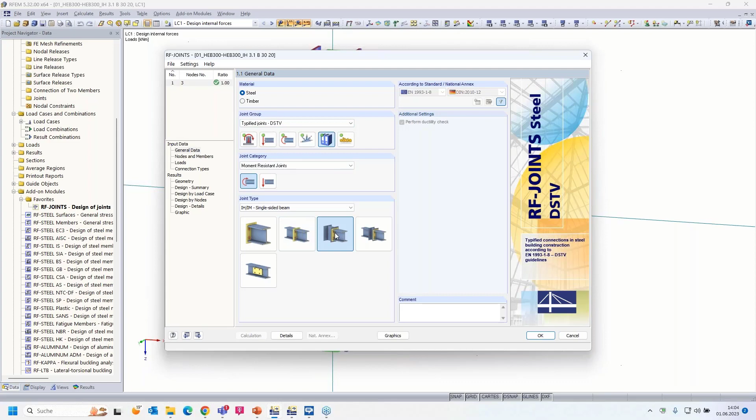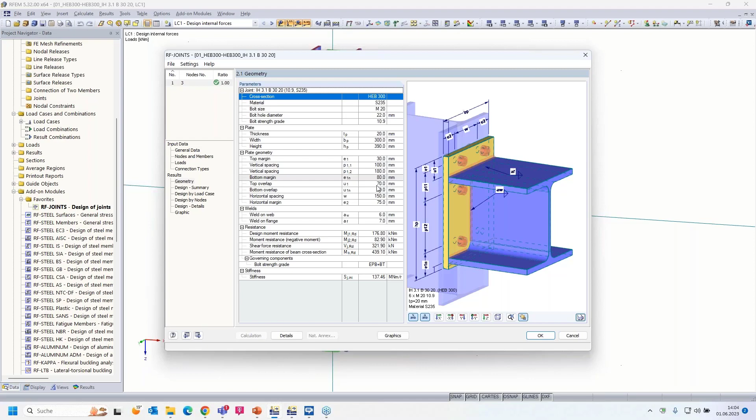Where are the DSTV connections? Rigid connection here. I had only one load, design internal forces, and this is the geometry. I will enter those or some of these values in our steel joints add-on - those are from the guideline. So that's the design summary: I applied the maximum load of 141.5 kilonewton meter, and I got a design ratio of 100%.

I would like to design that connection in RFEM 6 and compare the results. In the first step, only the moment; in the second step, I will combine M and V, the shear force as well. I can also show the connection in the preview. That's the preview.

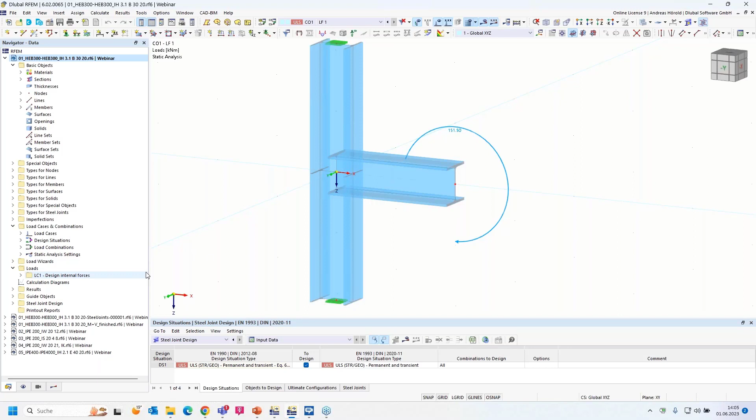So then I turn to RFEM 6, the same model. I had to do some preparations. We can't design a load case in RFEM 6 anymore; we have to define a design situation. I can show it. The first step is the load case, design internal forces, and there's only one load combination with that load case and the design situation, and steel joints is activated for it.

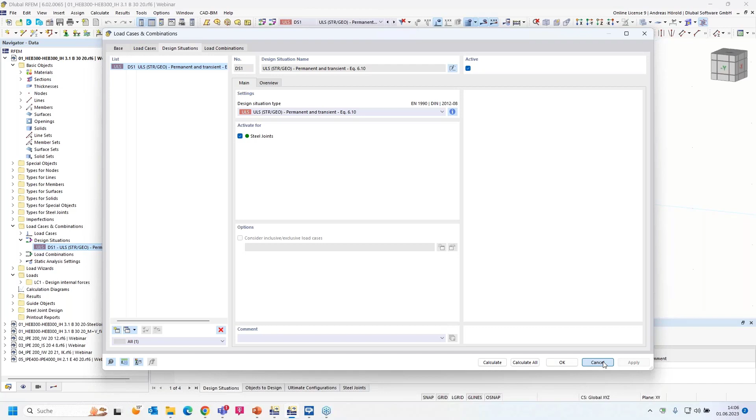Of course, it's necessary to activate the steel joints add-on first. Here, left above in the base data and under add-ons, it's necessary to do this check here.

Then I start with the types for steel joints. That object is activated when you activate the steel joints add-on. With a double click, I can open the dialog here. I have to assign a node - that node here.

It detects 3 members, and under members I have to support at least one end. That's automatically defined, I can change it, but it's quite good to have the support here on member 1. But member 1 and member 3 are continuous - that's the column, and the column is continuous.

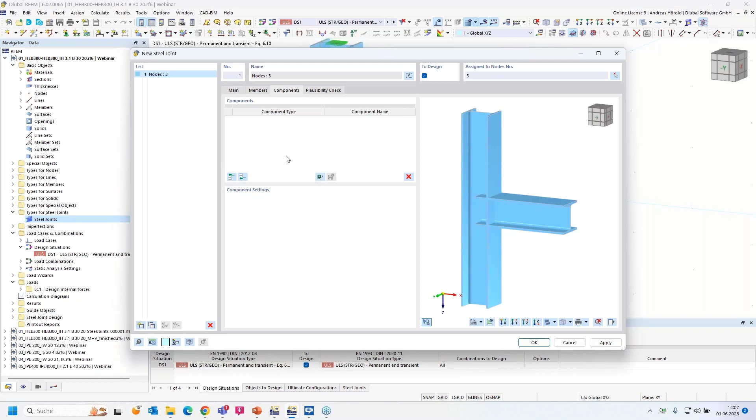I don't change any base data here for the material or the section, I leave that as it is. Then we have to enter the components. There are 2 possibilities: I can insert a component from the component database, or a complete connection from the library. I will show you both possibilities.

I start with a single component, an end plate. Now you can see here the different modifications: stiffening elements, plate, stiffener, haunch, end plate, fin plate, cleat, and so on. I choose the end plate.

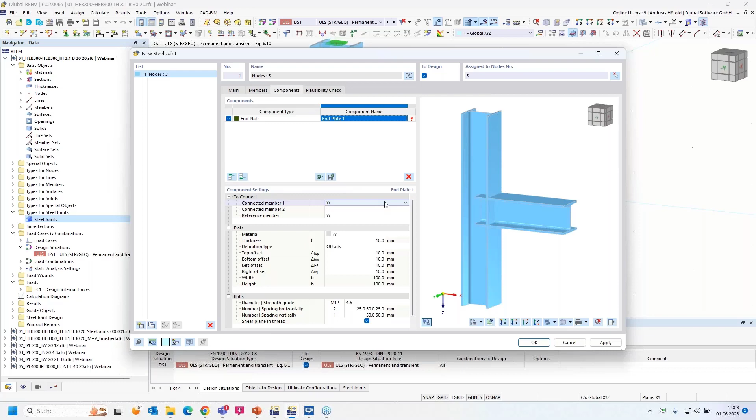The connected member should be member 2. Here you can see in the window on the right side that it's selected with yellow lines. Maybe I can zoom in a little bit so you can see the changes. The reference member or members are automatically detected, so the material of the connection should be the same as for the members. The thickness of the plate is 20 millimeters.

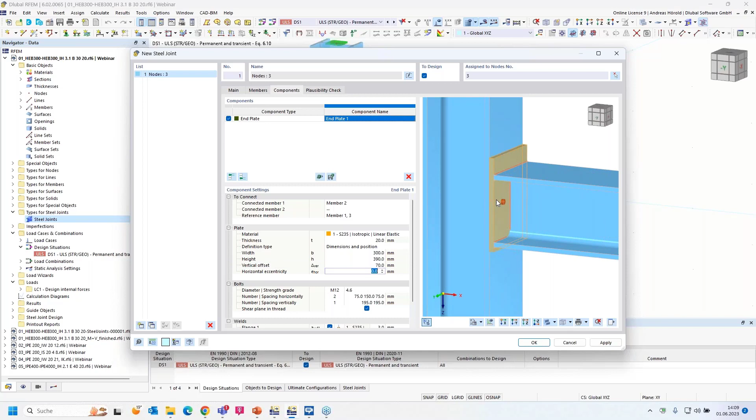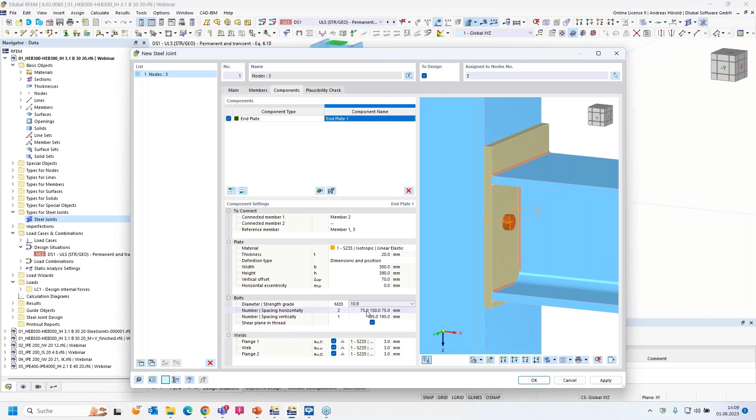Bolt M20, and the strength grade for such a rigid connection is 10.9. This is already good, but we need 3 spacings here, and we can increase the window a little bit. Now I have to enter 3 of the 4 values, and the last value is automatically calculated. So 30, space, 100, space, 180. Enter. So the shear plane shouldn't be in the thread, but in the shank.

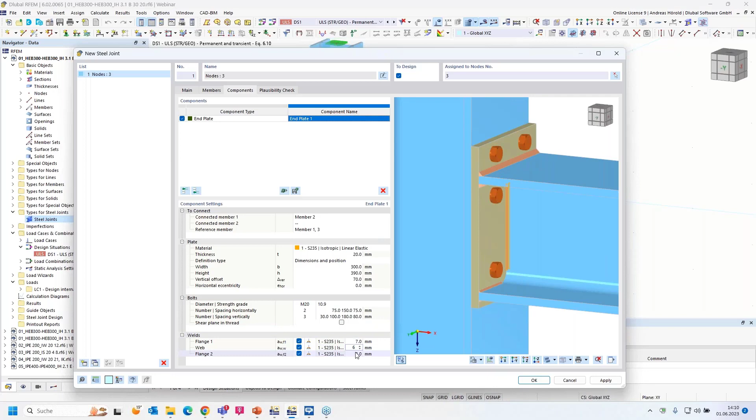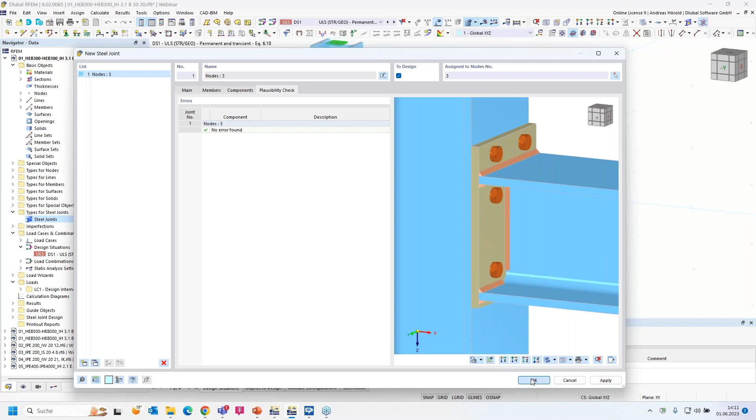At the end we have to define the welds: 7 millimeters for the flanges and 6 millimeters for the web. Let me compare the values. That looks good. We can do a plausibility check. No error found, that's quite okay. And we can start the calculation. At the bottom I have the button, and I can start the calculation.

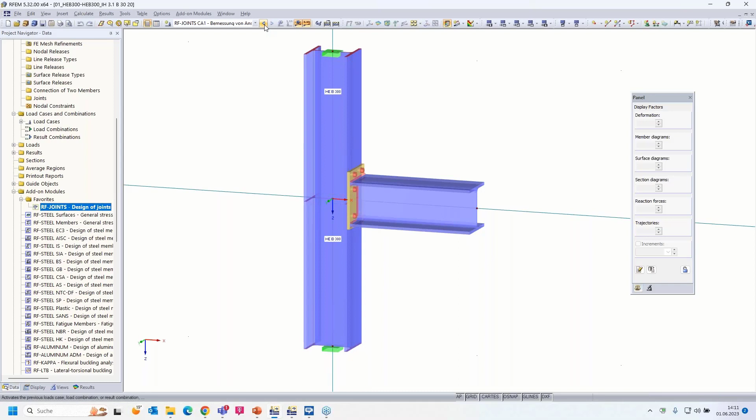Some of you could maybe already notice that I haven't got the same moment as in RFEM 5. I can show you RFEM 5 again. The maximum value from the DSTV guideline was 141.5, and I applied a different value.

Let me explain why I did that. I can't apply the same moment and then compare the design ratios, because we've got a non-linear material model, a plastic model, and that's why I can't easily compare the design ratios for the same load. I will explain that on a simple stress-strain diagram.

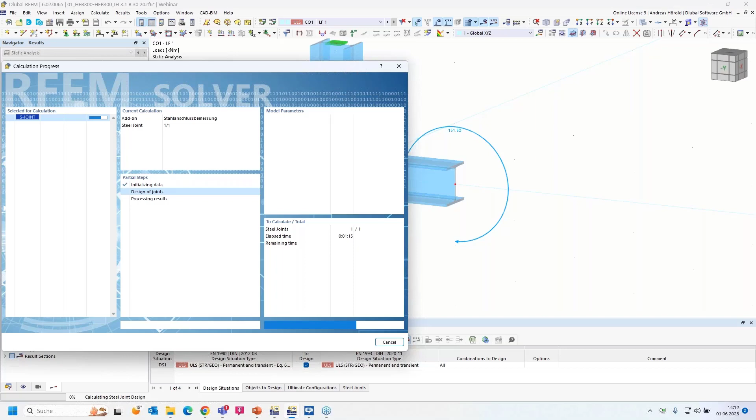At first, let me wait for the results, or maybe I can already show the PowerPoint so we don't have to wait. That's the material model for the surfaces and solids. For example, for the end plate and the flanges, the isotropic and plastic material model. The maximum plastic strain according to the Eurocode is 5%, and we compare the plastic strain with the limit plastic strain from the Eurocode, the 5%.

Imagine we get a result of plastic strain of 2.5%. Then we have a design ratio for the plate of 50%. So we would be in the middle, and then you can increase the load, you can multiply that by 2. We would be here, and that's why I didn't apply the same load as in the DSTV guideline and compare the design ratio. I hope it is clear.

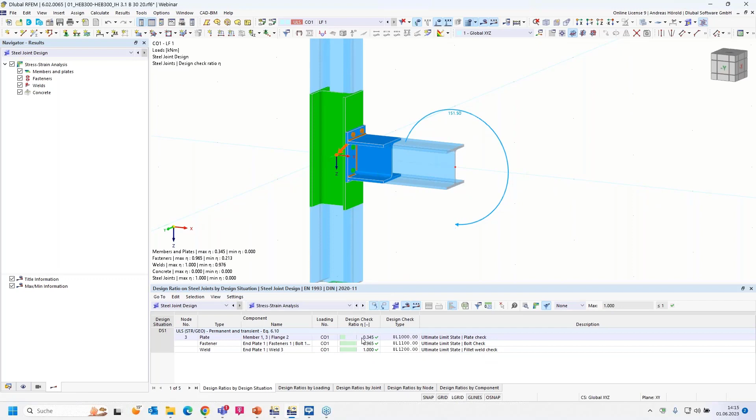Maybe then it's clearer. I turn back to RFEM 6 and I get the design ratio of 100% for the weld. For example, when you double click on that line here, you get the design ratio for the plate, 34% or about 35%, because the maximum plastic strain is 17 per mille, and the maximum plastic strain is 50 per mille or 5%. We compare those two values.

Let's turn back in the dialog. Those are the formulas and the design for the welds. And if you want to get the submodel in the background, the program creates a submodel with surfaces and bolts or welds for the bolts, and so on.

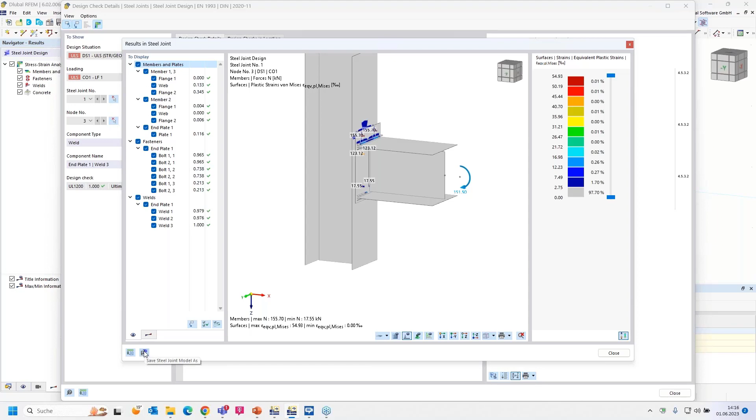I will show you that model, and I would like to show you where you can find it. You can click on that button, left above here, and then you can see the design ratios. You can, for example, switch off some parts and so on. And at the bottom left, you can press that button, and the submodel, the calculation model, is saved.

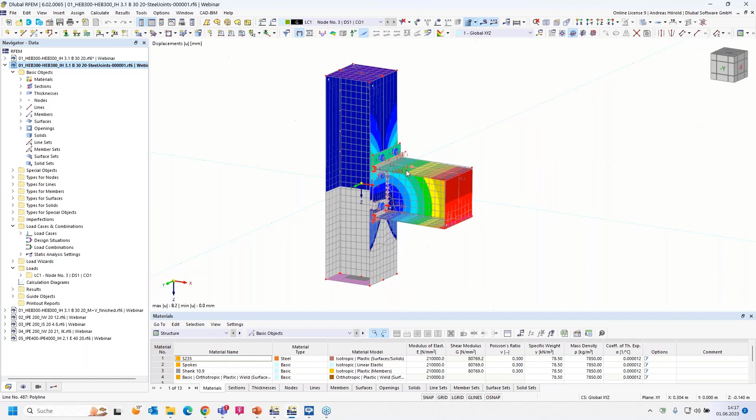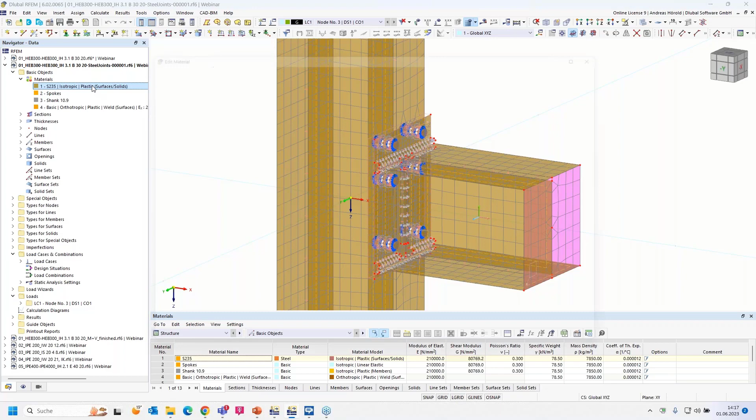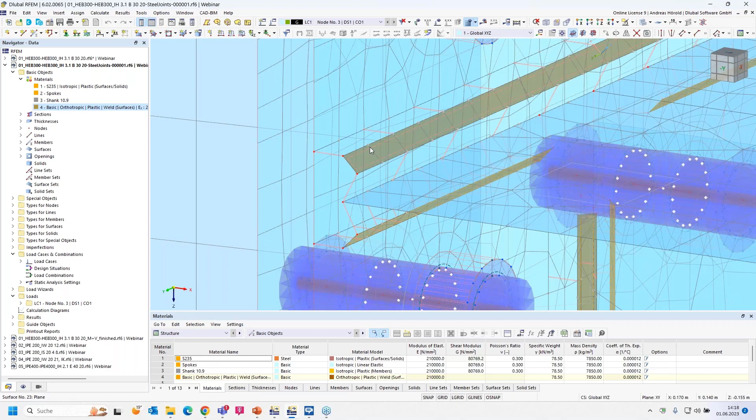So let's turn to that model. I open it. Yeah, that's the calculation model. Maybe I switch off the results, and I show the different materials. That's the material for the plate, and the flanges and webs, and so on. You can see it's an isotropic plastic material model. If I double click on it, I can see that diagram that I already showed in the PowerPoint. Now you have spokes for the bolts and shank, and those are the welds, the weld model. You can see the plastic material model for that surface here and such rigid links. Okay, that's our calculation model.

So then I turn back to the PowerPoint. For our first connection, I showed you the values in RFEM 5, the maximum DSTV value 141.5.

I applied 151.5 in the Steel Joints add-on. It was a lot of time to prepare those connections. I had to try until I reached the design ratio of 100%. And when I compare both moments, I get a ratio of

1.07. The maximum moment in Steel Joints is 7% higher than the DSTV guideline, but only when I apply the moment only. I have also combined M and V, the moment and the shear force. The maximum shear force according to the DSTV guideline is

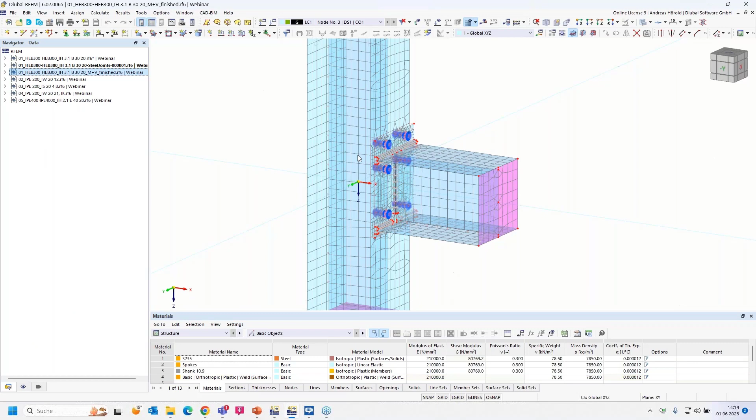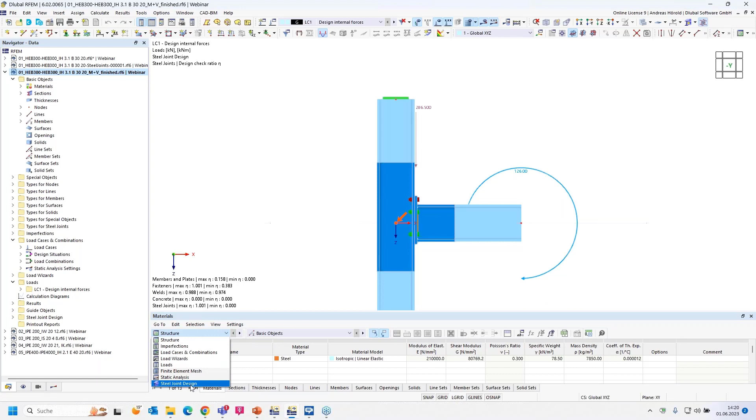I can show you the model. So that's the same model, and maybe I can switch on the transparent model. I applied shear force here and the moment, and both are 89% of the maximum values according to the DSTV guideline. And I got a design ratio of 100%.

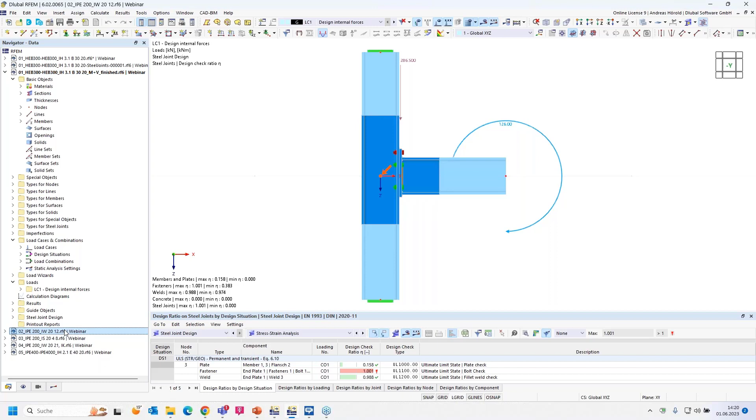Okay, then we turn to the next steel joint, next connection. Also a simple model, a main beam and a secondary beam. We have got one load and we get a shear force.

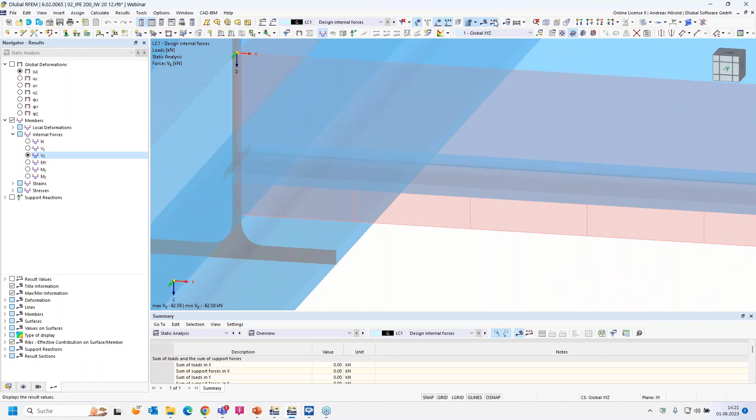I can show the shear force. Is it? Oh, it's not calculated yet. The shear force should be the half of 125 kilonewton. Internal forces we set with values. Okay, yeah, 62.5. Okay,

so I turn to the Steel Joints, to assign the node. Okay. One member should be supported, that's okay, and the main beam should be continuous.

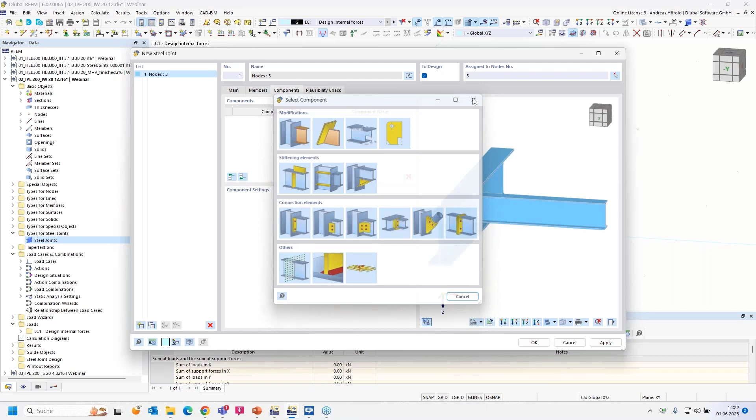So this time I don't use, I could use the components. Here you can see the cleats. I would like to assign a cleat. This time I use the component library with all the predefined connections.

So then you can see the general categories, the rigid connections, beam to beam, beam to column, with haunch, column stiffness, and so on. Then the pinned connections, cleats, thin plate, and so on.

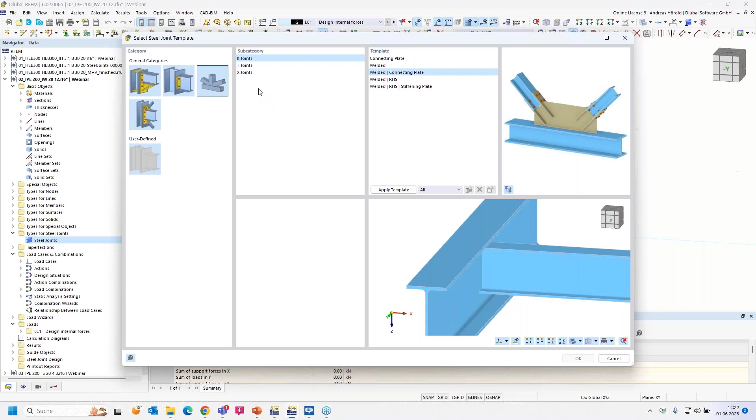Then the trusses, welded trusses. Well, we already have got a lot of connections implemented. Then the bracings, and we will extend that library continuously.

I turn back to the pinned connections, beam to beam, and I would like to define a cleat or two cleats on both sides. That's why I have to apply the template, and we have to wait a short moment, and then we can see in the preview the two cleats.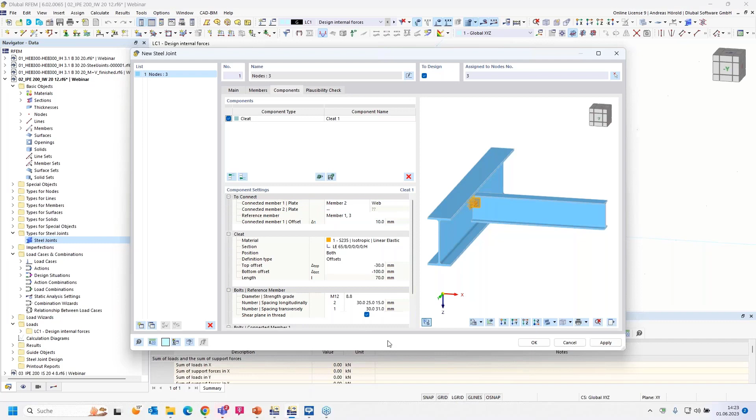We leave the library and we have got to do some modifications. So, okay, I zoom in a little bit.

Okay, member 2 is the member that needs to be connected. That's the main beam 1 and 3. So the offset is 10 millimeters. That's okay.

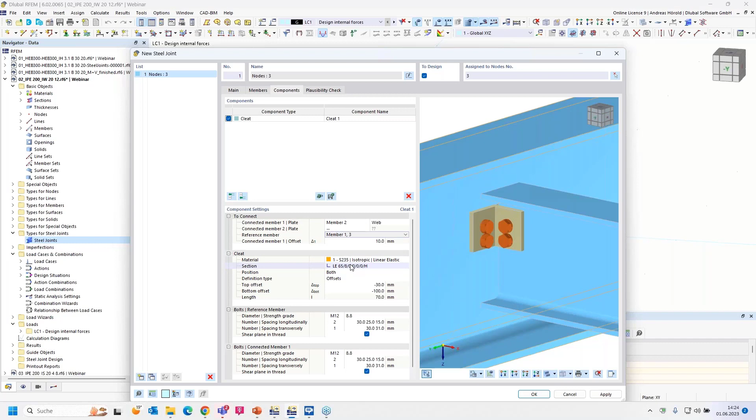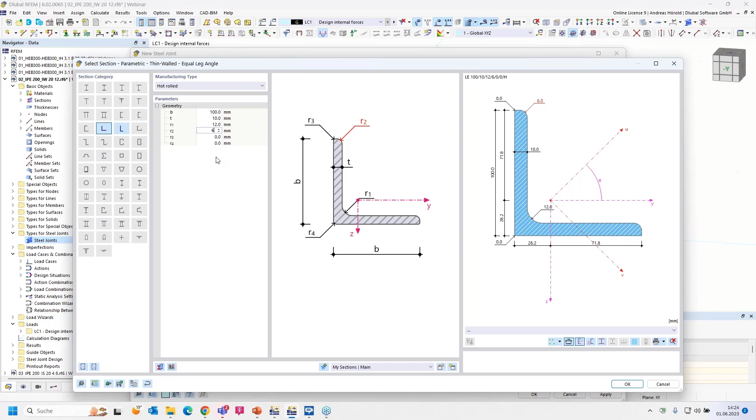Material is okay, S235, but the section needs to be modified. I select an equal leg angle. The width is 100, thickness 10, then 12, radius and 6. That's okay.

So the position should be, it's clear on both sides. I can also assign only one cleat, but in my eyes that makes no sense. Both. Then definition type, I like the length and position to enter the values. Length is 150 millimeters, no eccentricity.

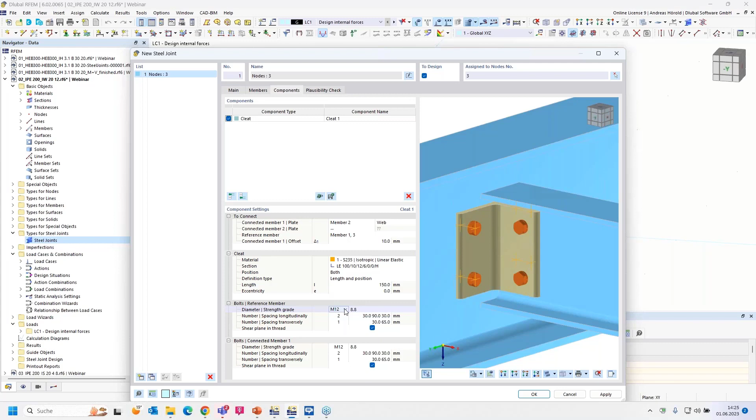Okay, then the bolts. M12, but this time M20, and the strength grade this time 4.6. So I have to enter only one value, the other values are calculated automatically. The same for this, 30. Okay. Shear plane in thread, no.

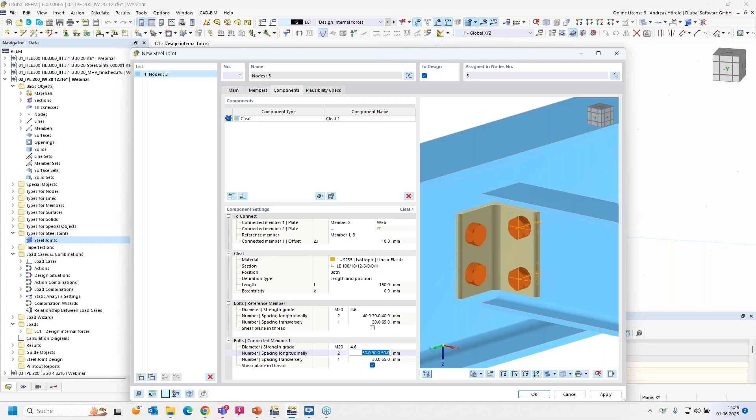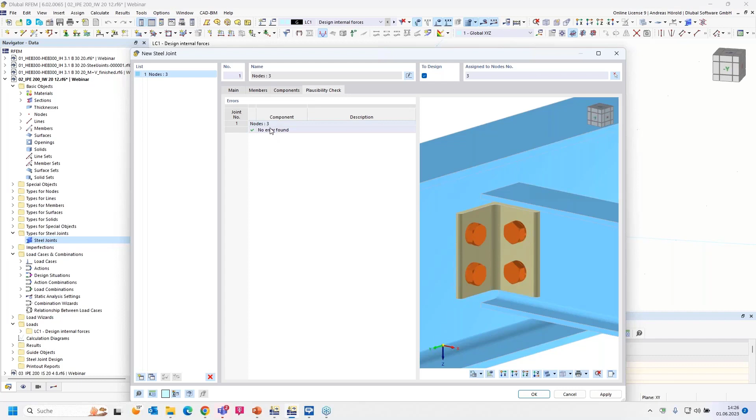Then for the other side, also M20 and 4.6 as strength grade. Then 40 and 40 and 55. And shear plane not in thread, but in the shank. So, okay. Then the plausibility check, no errors found.

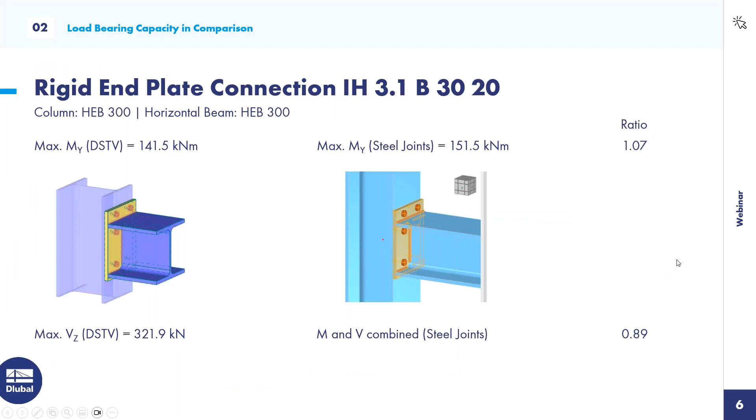Okay, I can calculate the connection. So, and in the meantime, we open the PowerPoint again so that we skip the calculation time.

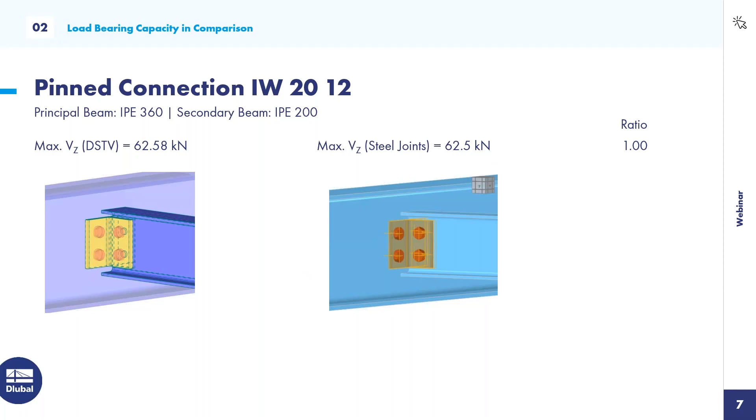Okay, let's turn back to RFEM 6. It takes some seconds in combination with the GoToWebinar software. It takes a little bit longer than without, but we have to wait.

And the design ratio is about 100% for the fasteners that time. You can double click on it, or you can also use that button here, design check details, and you also reach the dialog.

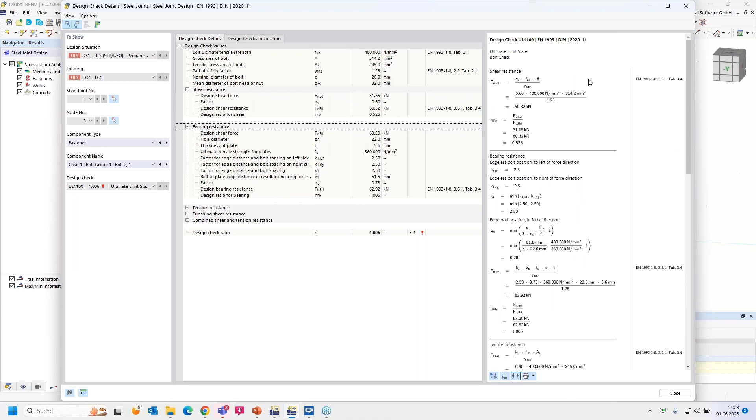And that's the design check ratio for the bolts. And you can see all the equations from the Eurocode here. Okay, that's all for that connection.

We turn to the next prepared model. Now the same model you can see with a higher load, and I would like to apply another connection with a thin end plate. So that's why I open again the Steel Joints dialog.

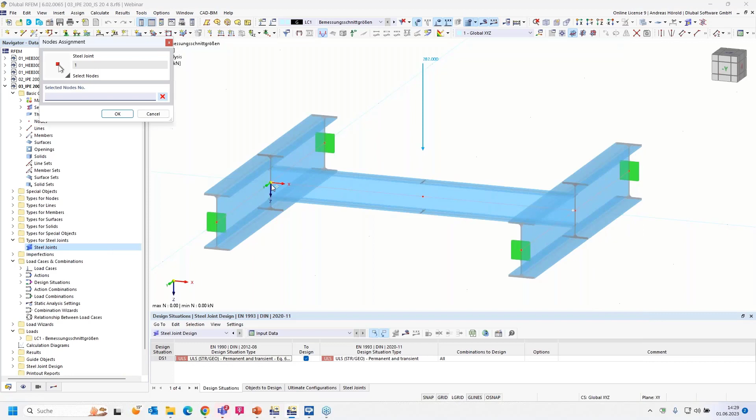The same node number 3. Oh, it didn't get it. Okay, now.

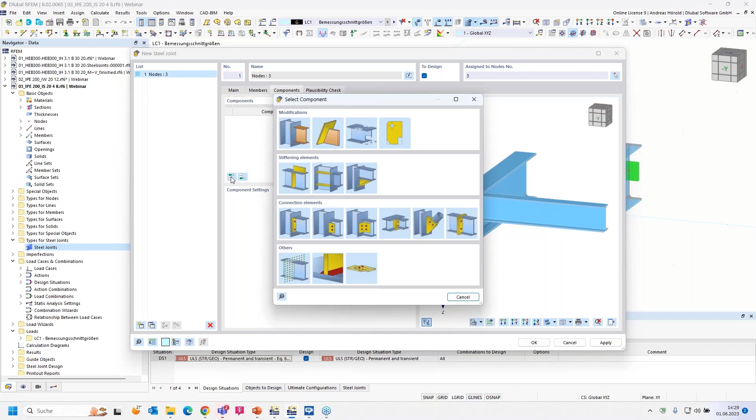Members, one supported end, and the main beam is continuous. So the components, I use an end plate. The connected member is again member 2.

Same material as for the members. The thickness, a thin plate, 10 millimeters according to DSTV guideline. Dimensions and...

Positions, 160, 150, minus 25. Oh, no. Minus 25, 0. No eccentricity.

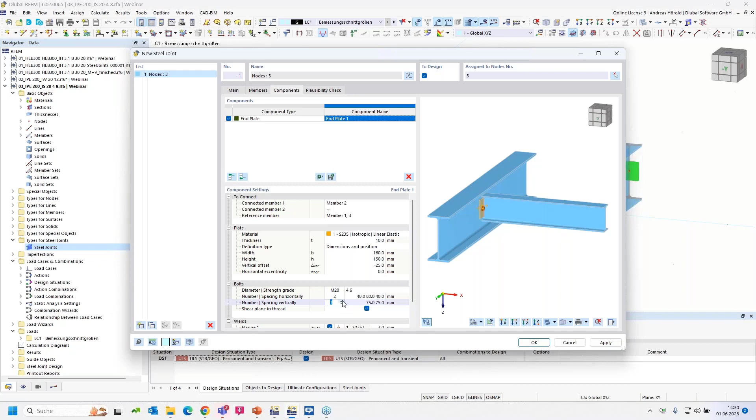So then the diameter of the bolts are M20. Didn't get it. Okay, M20. 4.6 is okay. The values are okay, but not the number of bolts. So, and then 40, space 70. Okay.

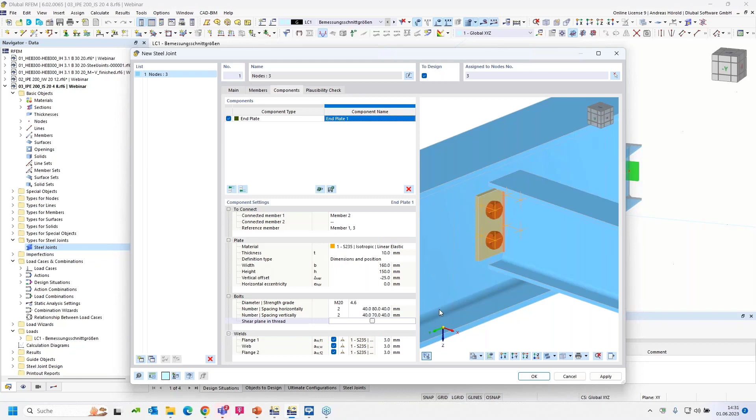No shear plane in thread. And if you zoom in, you can click on the welds. You can see there's no weld for the flange. We can deactivate it. But for the web, you can see it's selected, and we leave the 3 millimeters.

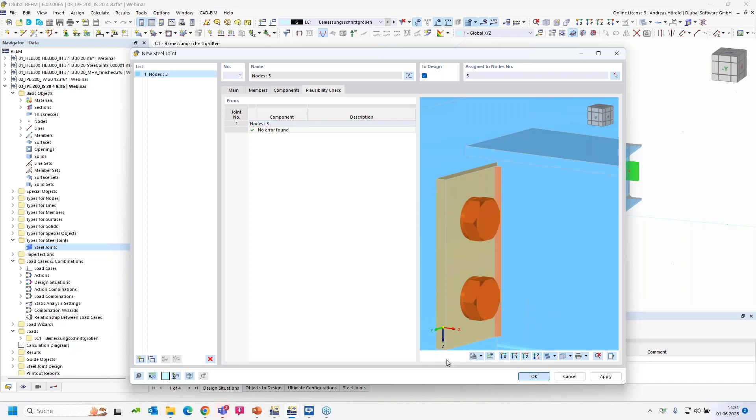Okay, then let me do a final check. Oh, that's okay. So then plausibility check, no errors found, and we can run the calculation.

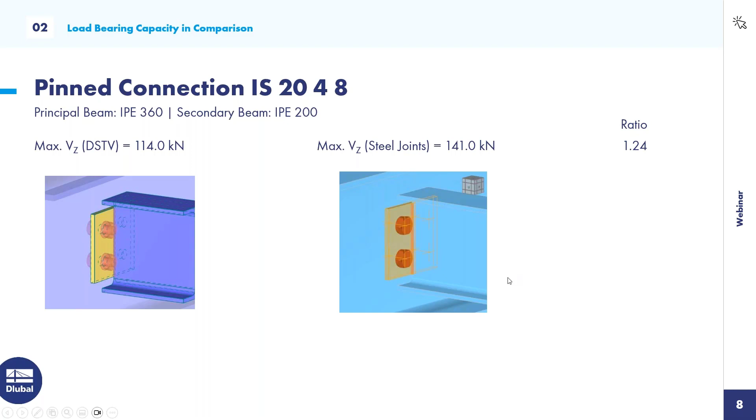Okay, let's turn back to the program. It's already calculated. This time the weld has the maximum value.

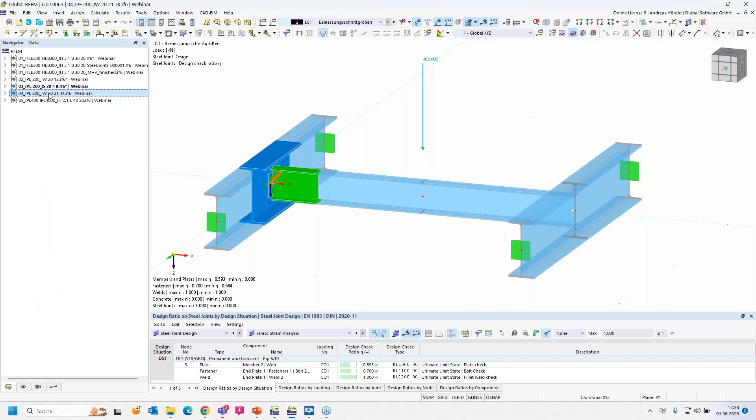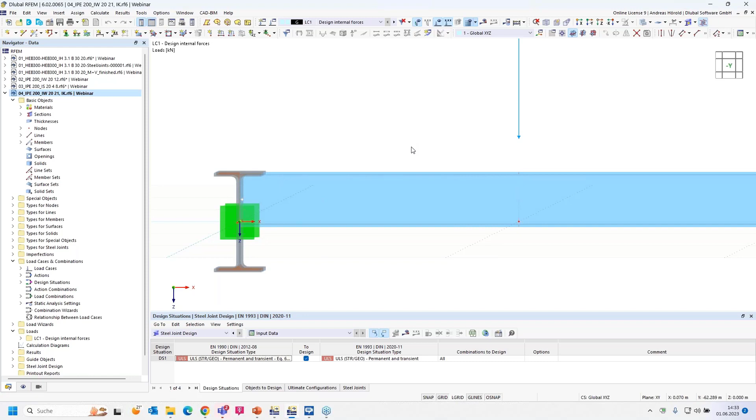Okay, then to the next connection or the next prepared model, almost the same model, but I applied an eccentricity for the beam here, for the secondary beam. That means that we have to cut the member. Just imagine there are a grating or a sheet on the top of the beams. That's why I defined such an eccentricity.

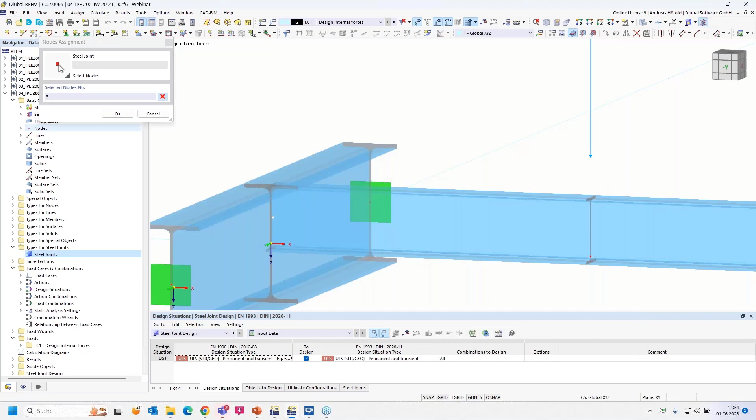So, okay, and we have considered that in the connection. So I open steel joints again. I have to define or select the node. Then the same procedure here.

So, and now I don't define a connection. I already defined the connection before the webinar and saved it in the library. And now I would like to load that connection from the library. That's what you can do for your connections as well.

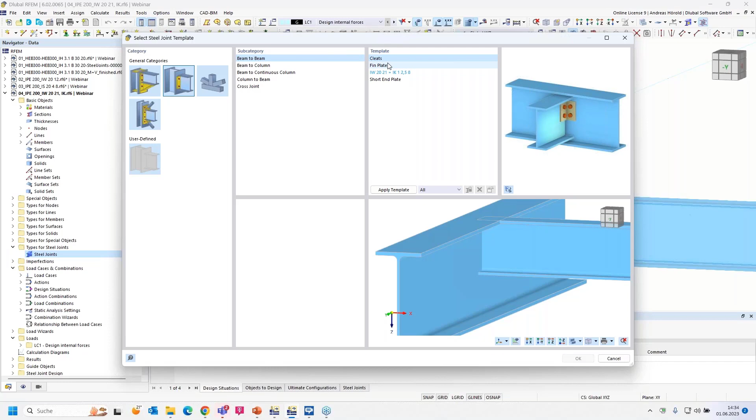It's a pinned connection. A pinned connection. And now you can see the beam-to-beam templates here. And you can go only the predefined or only the user-defined connections. There's only one connection or all.

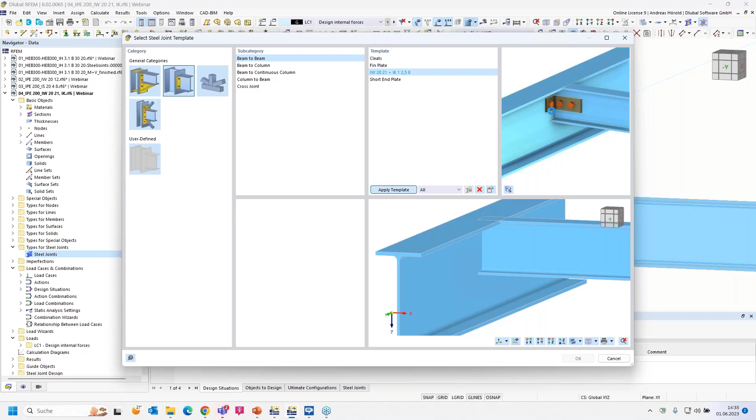So, and I select it and apply the template. And the template contains the cleat and the member cut. We can see that in the preview here.

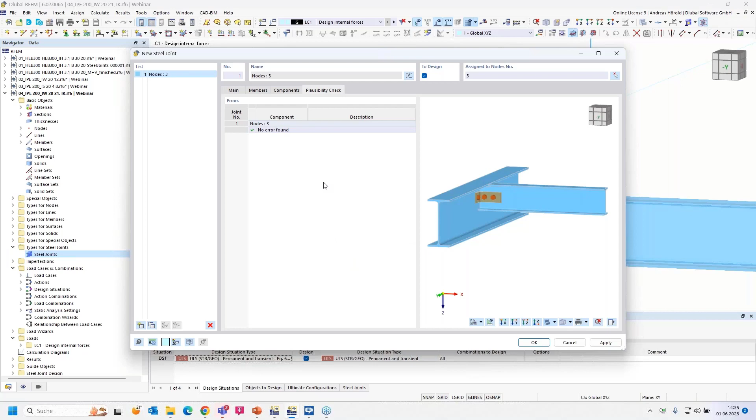Okay, so we leave the dialog and load the connection. Now you can see the cleat and the member cut. So we do a plausibility check. No errors are found. So, and we run the calculation.

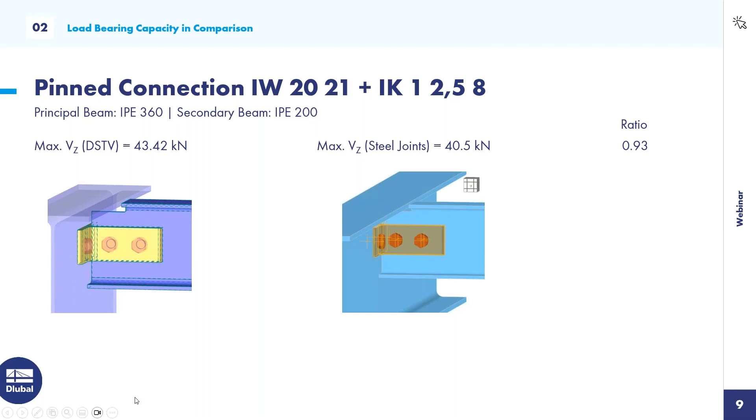So we turn back to the program, and you can see the maximum value is for the plate about 100%. You can double click on it, and you can see the maximum plastic strain is about 5%.

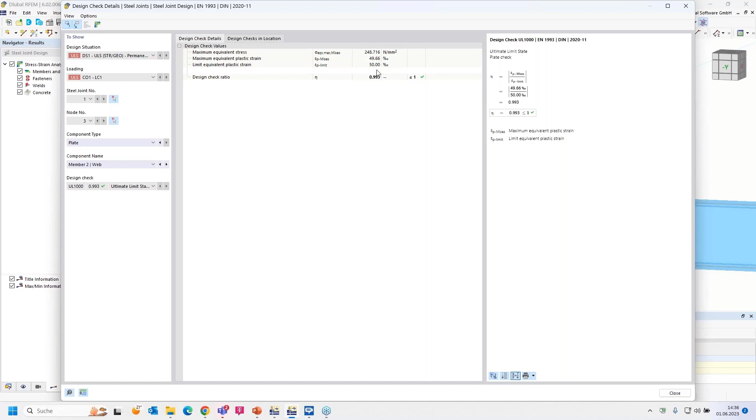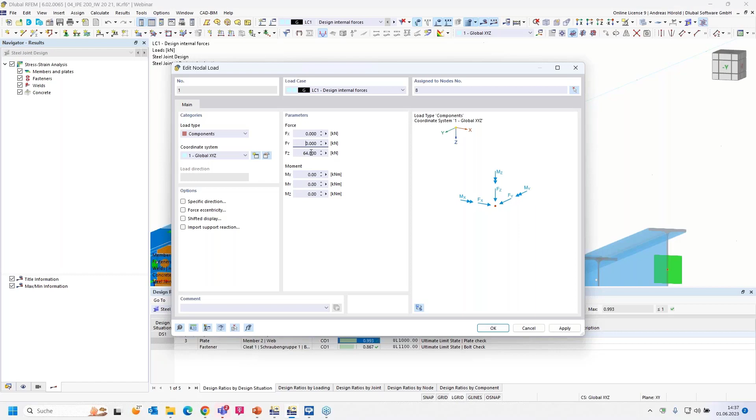So, and now we can try that. We can decrease the load. Yeah, for example, I can apply only 80% of the load on the connection. I can enter a formula here: 81 multiplied by 0.8. Okay, and the program calculates the value automatically.

So now we have got only 80% for the load, and if we run the calculation, we don't get a design ratio of 80% for the plate because of the nonlinear stress strain diagram, the nonlinear material behavior.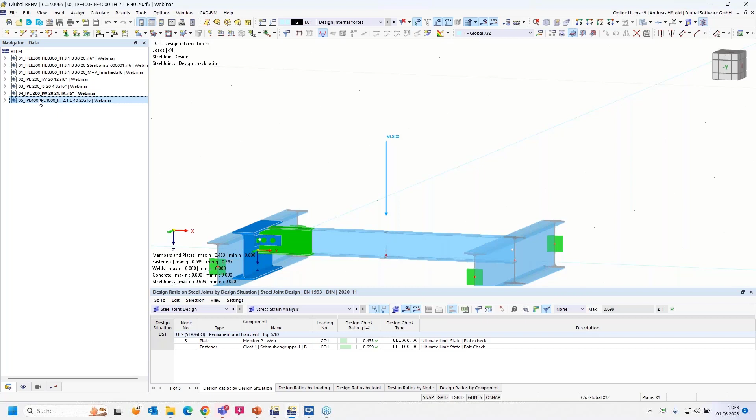Okay, then we turn to the last connection for today. IPE 400 to IPE 400. And I would like to apply a rigid connection here with end plates.

So types for steel joints, steel joint. I have to assign the node here in the middle. Okay. Members are supported, or one member is supported.

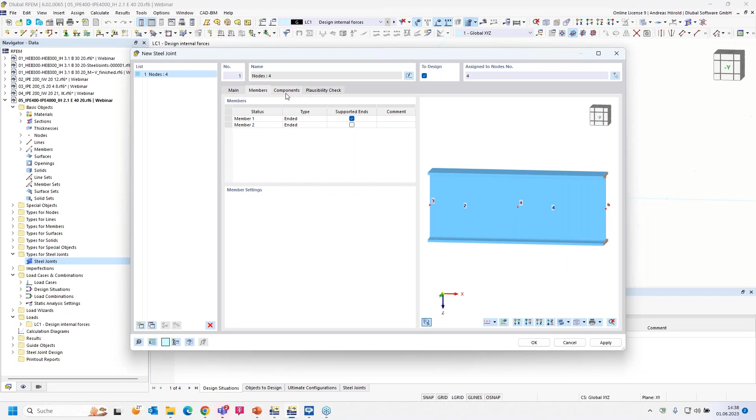And I load also a component from the library. I had, before the webinar, prepared such a connection, rigid connections, and you can see here the defined connection. And I apply the template.

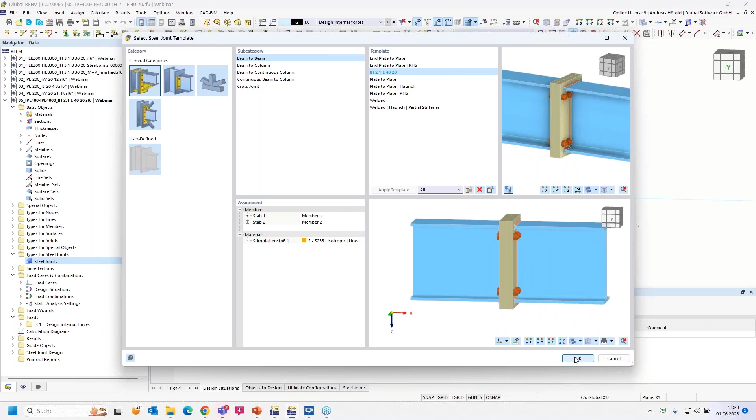Okay, so if I press OK, it overtakes the predefined and saved connection. You can do a plausibility check. That's okay. And then we run the last calculation. So let's skip the calculation time.

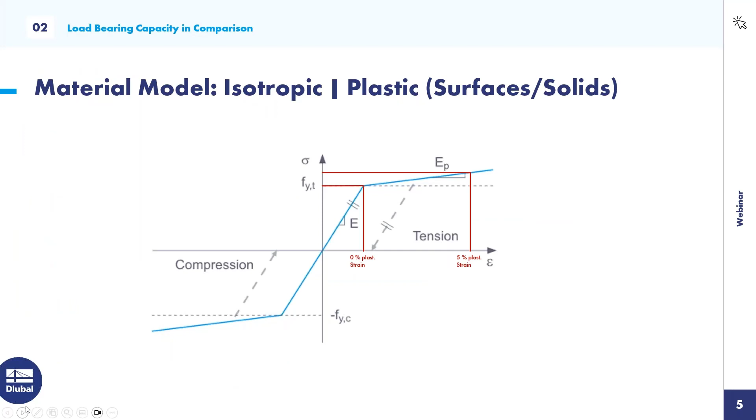We turn back to the PowerPoint. So that's the last connection, Beam IPE 400. The maximum value according to the DSTV guideline is 213.1, and I could only apply 189 kilonewton meters in the steel joints add-on in RFEM 6. So we can apply only a load of 89% of the maximum load from the DSTV guideline. And it will be a little bit decreased if I also apply shear force.

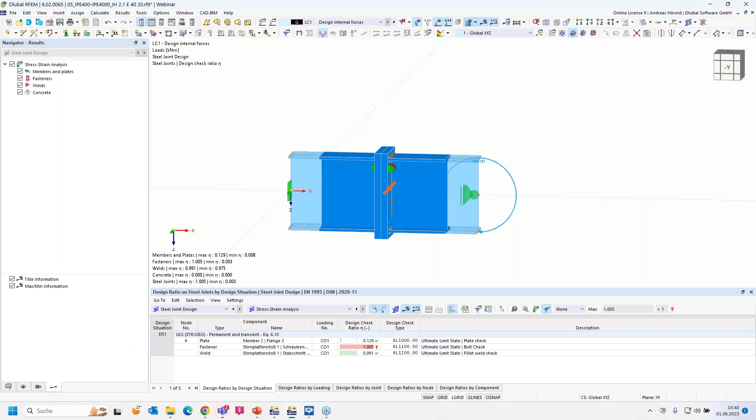Let's show you the results. Okay, you can see 100% for the fasteners. Okay.

Yeah, that was the last connection. You could see we've got different ratios, different results for one connection, the same ratio for both DSTV and the steel joints. Yeah, there are two different approaches. The DSTV guideline calculates the maximum values or maximum ratios with the component method, and steel joints uses the finite element analysis. Two different approaches and similar results, but not the same.

I think that's clear. But maybe you ask, why should I use the steel joints add-on when I can sometimes apply only a smaller load than in the DSTV guideline, for example, or other guidelines with standardized connections?

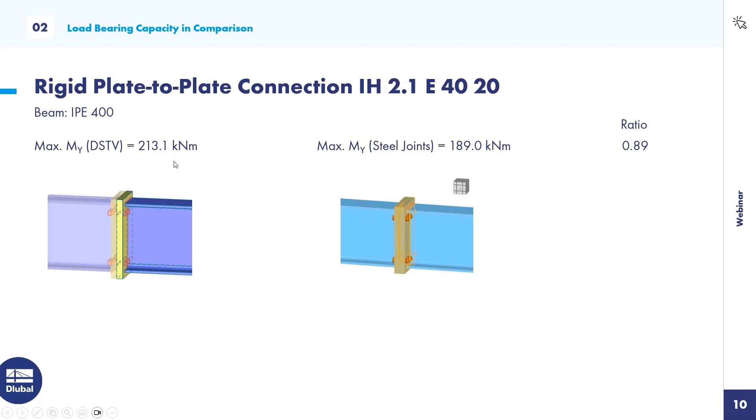Yeah, when you calculate a structure in RFEM 6, for example, and other programs, you usually do that in the 3D model. Then you get internal forces, also MZ or torsion and so on, and then you can't apply the DSTV or other standardized connections, for example. And if you've got only, for example, for this connection, only a moment and the shear force, just use the DSTV guideline. But when you've got a 3D structure and you get, for example, torsion or MZ or normal force or shear force in direction of the weak axis, then you can't use such standardized connections.

At least, for example, for this connection, when the normal force isn't, I think, higher than 10% of the plastic normal force. And with the program steel joints, you can consider all those three-dimensional internal forces.

And that's, in my opinion, the best feature for this add-on, the main advantage. A further advantage is you don't have to import the internal forces from external programs.

You usually calculate a more complex model than in this webinar. Then you pick the nodes and you create the connection and you calculate the connection. You don't have to import any internal forces. And these internal forces and moments and so on are always up to date.